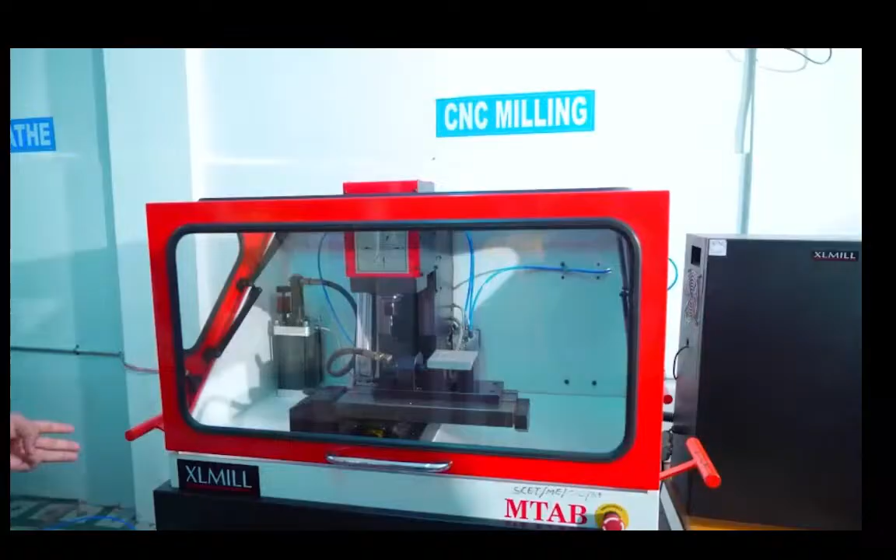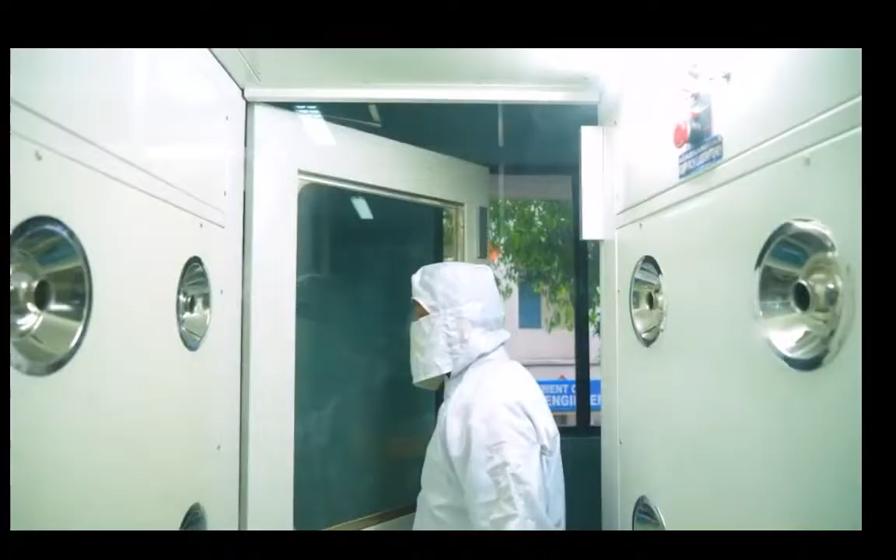Workshops of all branches, namely mechanical, electronics, computer science, robotics, artificial intelligence, nanotechnology, are equipped with latest machinery and tools that help the students to hone their practical skills.

Swarnandhra constantly motivates its students towards fulfilling learning experience. There are 5 separate hostels available in the campus of Swarnandhra College of Engineering and Technology. Hygienic mess and food courts. Round-the-clock security. CCTV surveillance in the campus. Departmental stores and ATM center serve the needs of students here.

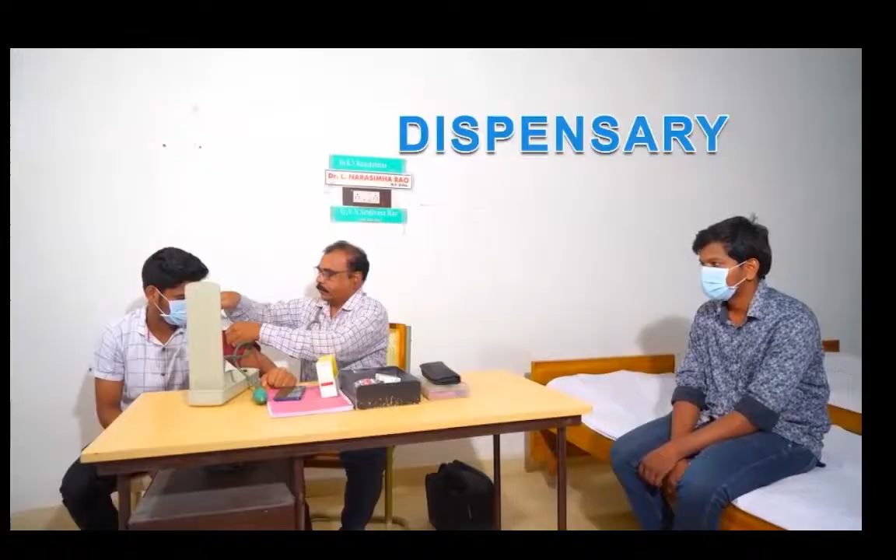Support of industry professionals. Your admission into Swarnandhra College of Engineering and Technology makes you transform your tomorrow with the skills you learn today. Because stepping into their engineering program molds your creative absorption into technological passion.

The UG courses in BTech ranging from civil, mechanical, electrical and electronics and communication, computer science, information technology, artificial intelligence and machine learning, CSE and data science.

CSE cybersecurity, CSE and business systems, artificial intelligence, data science, robotics. PG courses such as MBA, MCA, MTech, structural engineering, power electronics, CAD, VLSI systems design, computer science and engineering, thermal engineering, communication systems, diploma courses like electrical and electronics, electronics and communication, computer science and engineering, artificial intelligence are all dealt with efficient range of commitment and euphoria. Swarnandhra College of Engineering and Technology not only offers all these branches and courses, but also encourages its students to work on live projects and collaborate with their peers, giving them a taste of real-world scenarios. Outcome-based education, choice-based system, open institutes for academic enhancement. They are all well-qualified and experienced faculty involved in quality education and R&D activities.

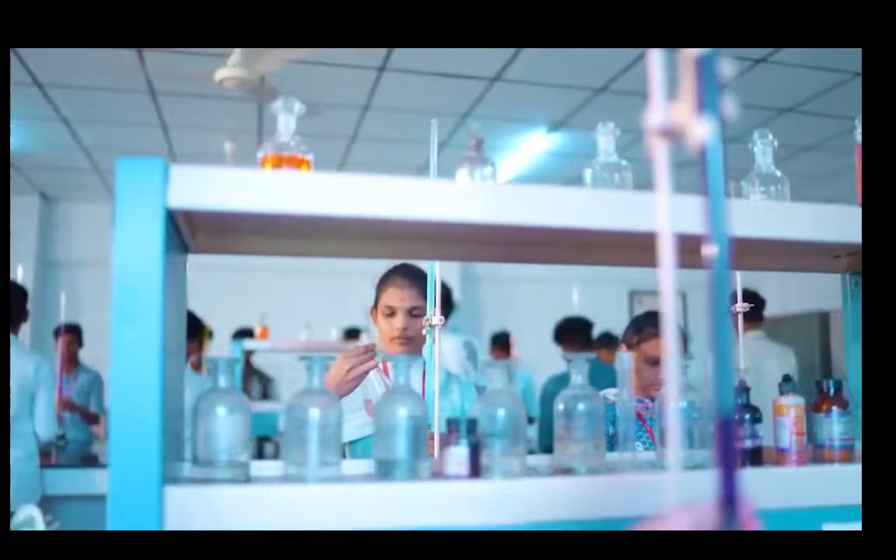Faculty members of Swarnandhra College of Engineering and Technology are not only knowledgeable but also passionate about teaching. They ensure that the students are equipped with the latest technical knowledge and are prepared to face the challenges of the industry.

Swarnandhra College of Engineering and Technology paves the path to discover the power to innovate with its centers of excellence: the CM's Skill Excellence Center, IBM Center of Excellence, Indo-German Collaboration ARC Laboratory, Intel Center of Excellence, VMware Center of Excellence Laboratory, Dassault Systems Lab, Cisco Networking AWS Lab, Nanotechnology Research Laboratory, and IoT Incubation Center.

Swarnandhra College of Engineering and Technology believes in the holistic development of its students, with a wide range of extracurricular activities that help students develop their leadership skills, communication skills, and teamwork abilities. A fabulous auditorium hosts various events and guest lectures throughout the year, and sports facilities such as cricket,

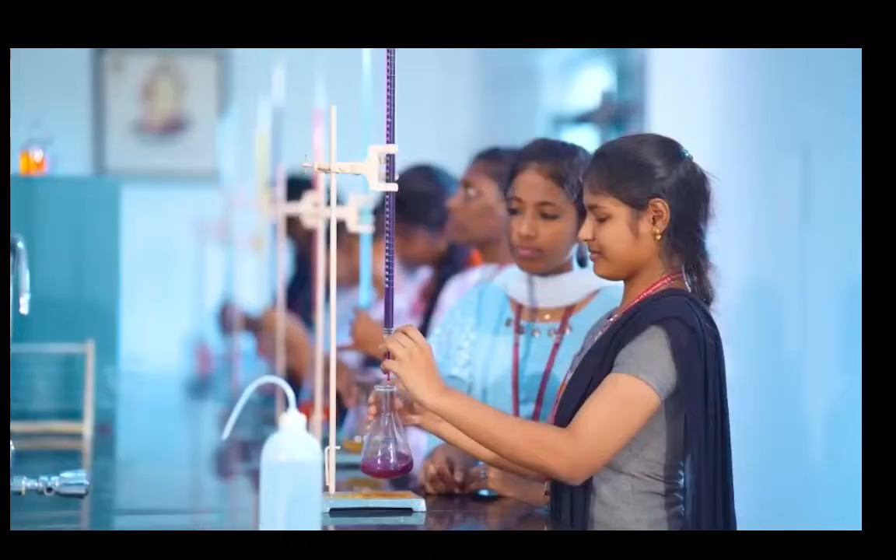With its more than 2 decades of untiring and uncompromising quest, empowering the next generation of engineers, Swarnandhra College of Engineering and Technology had unleashed the potential of thousands of enthusiastic students with its engineering program. Yes, Swarnandhra College of Engineering and Technology is pushing the boundaries of technology. Are you ready to join it? Do you want to forge your own path with its top-notch engineering curriculum? Don't you want to be part of a community of innovators, creators, and problem solvers?

Swarnandhra is a place where thinking out of the box is contagious, and it is also a place where ideas inspire change. Here you are welcome to the prestigious Swarnandhra College of Engineering and Technology, where excellence meets innovation. It is a well-maintained campus with green orchard in beautiful ambience, very conducive. 2,000 computers are available with LAN connection and an internet facility of 800 Mbps bandwidth, and Wi-Fi signals spread to all the nooks and corners of the campus. A separate computer center with digital library and a central library with 60,000 volumes and 9,500 titles are available for the students with hands-on experience in their respective fields.

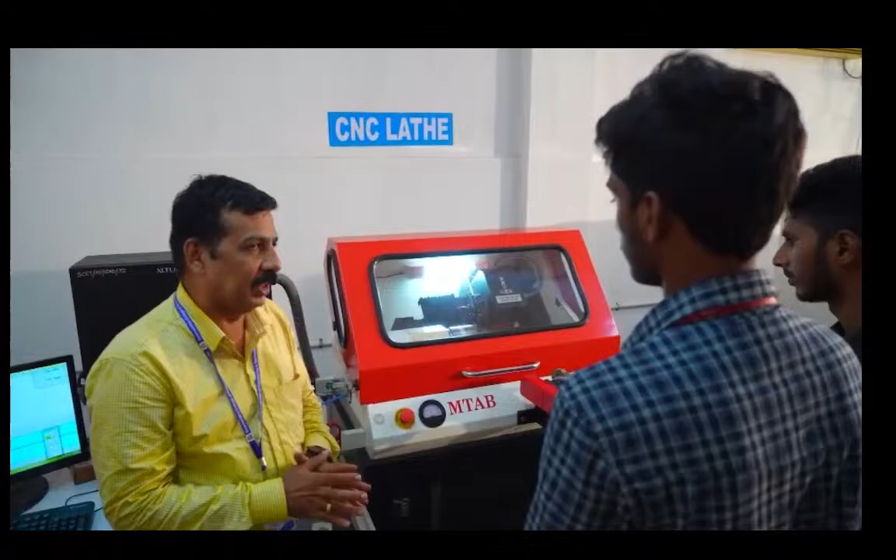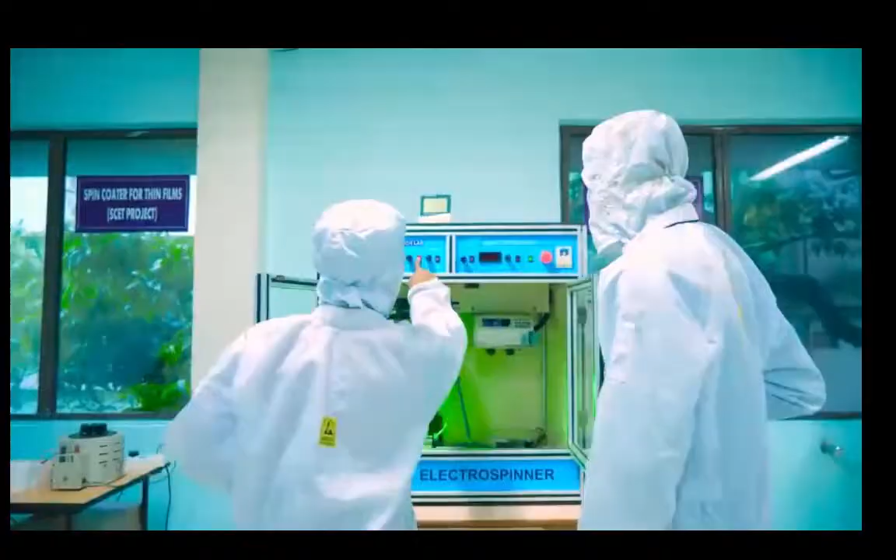Workshops of all branches, namely mechanical, electronics, computer science, robotics, artificial intelligence, nanotechnology, are equipped with latest machinery and tools that help the students to hone their practical skills.

Swarnandhra constantly motivates its students towards a fulfilling learning experience. There are 5 separate hostels available in the campus of Swarnandhra College of Engineering and Technology. Hygienic mess and food courts. Round-the-clock security. CCTV surveillance in the campus. Departmental stores and ATM center serve the needs of students here.

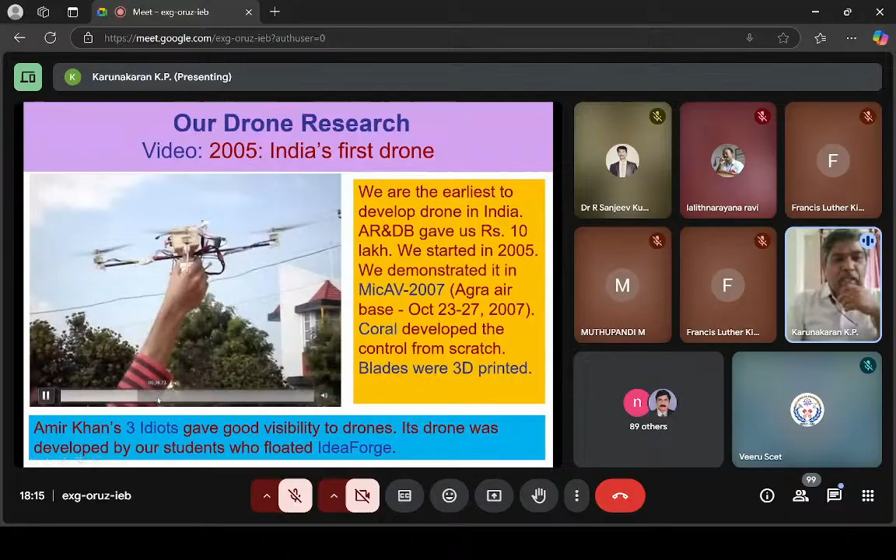That's a video of our first drone. At that time, even the controllers were not available. It was totally unstable. The sensors were not very amenable. So you see that it's flying somewhere. Somehow we managed to.

Sir, please unmute, sir. Okay. Oh, you didn't tell me at all. Should I repeat? No, sir. No, continue, sir. Okay. How did it happen?

Okay, I told here that we are the first in the country to develop a drone. This is our first drone, or probably country's first drone. Okay, so last year we introduced it as part of our curriculum. We call the courses MS101, Makerspace. MS stands for Makerspace. So in the second half of the semester, about 6 weeks, each week has 2 lab sessions, so totally about 36 lab hours.

762 students built 127 drones. So that is a very good achievement, and that is still continuing for the third semester, because drone is a product which involves all fields of engineering. So we thought it is important to introduce drone because electronics is involved, chemistry is involved, fluid flow is involved, carbon fiber is involved. So almost any technology you name, control, that means electrical department, then computer science department, all are involved. So it's a very good package to teach what is mechanical engineering.

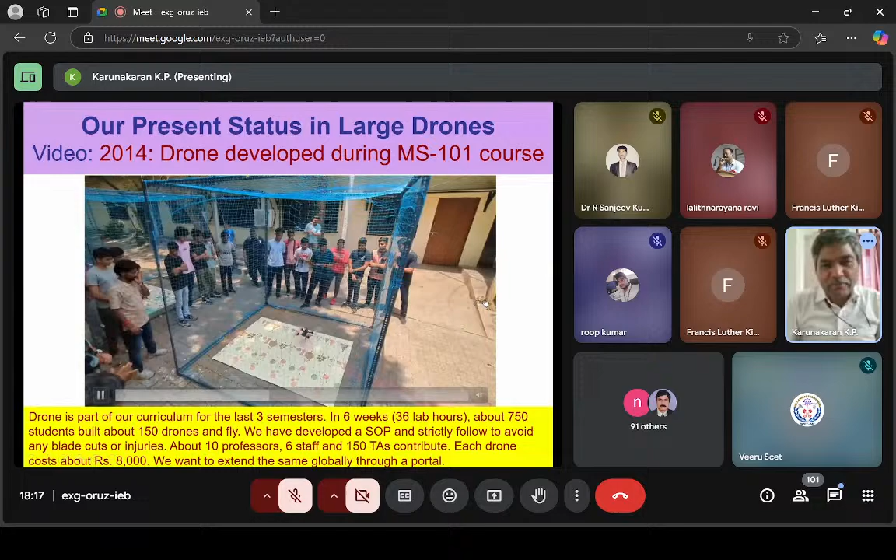Okay. Subsequently, I switched over to manned drone. In fact, initially I started with coaxial helicopter that I showed in the opening slide. Then we realized that larger propellers and powerful batteries are available. So we switched over to drone again way back in 2019. Okay, then we made a mock-up, demonstrated it in Delhi.

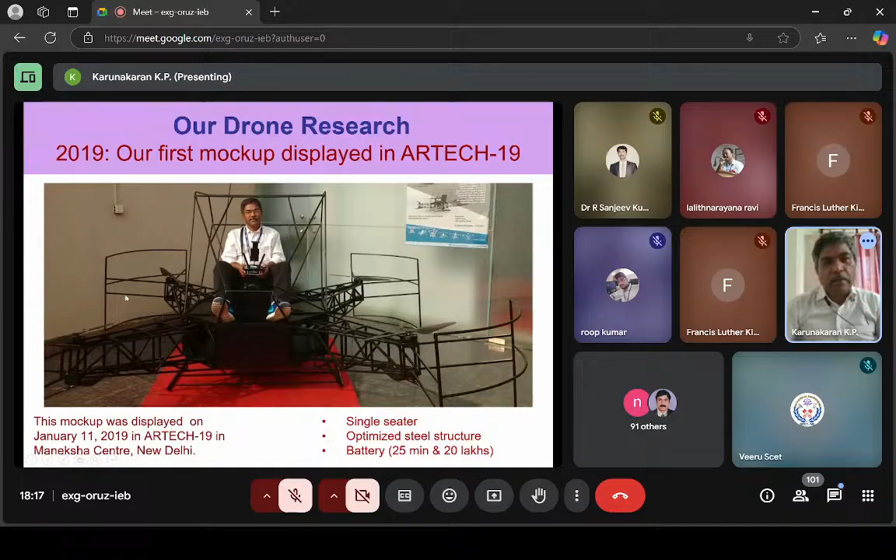It's a static mock-up. So we started the work in 2019, and by 2021 I was able to fly the first drone, and this is the flight test on April 10 last year. And I don't allow my students to fly, so I only sit and fly because it is still not a very reliable product. So I could reach a height of about 10 meters and very stable.

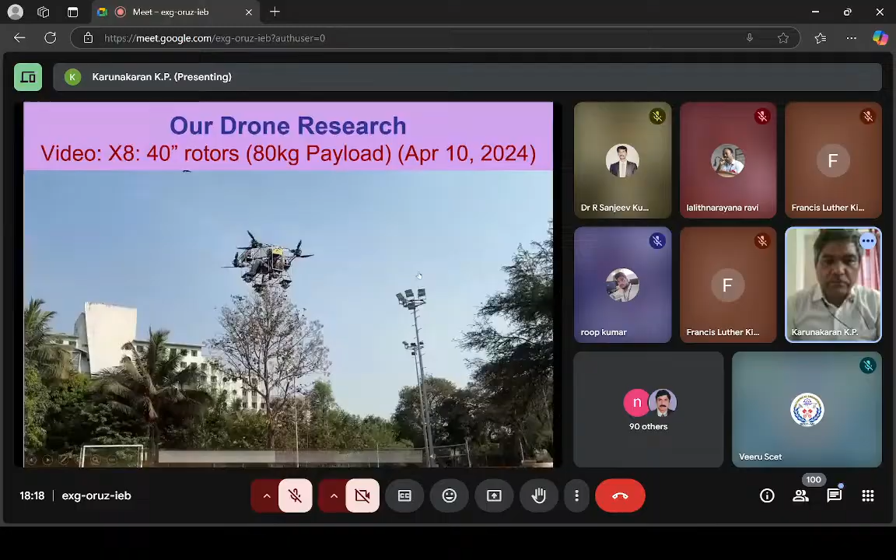So you see that this has 8 rotors. And we used football as the landing gear. You see the bouncing is very good. And what we used for the body is stainless steel. You know, normally people talk about aluminum or carbon fiber material. We decided to use stainless steel and fabrication through welding, because that becomes very affordable. Not only affordable, it is also good in fatigue life.

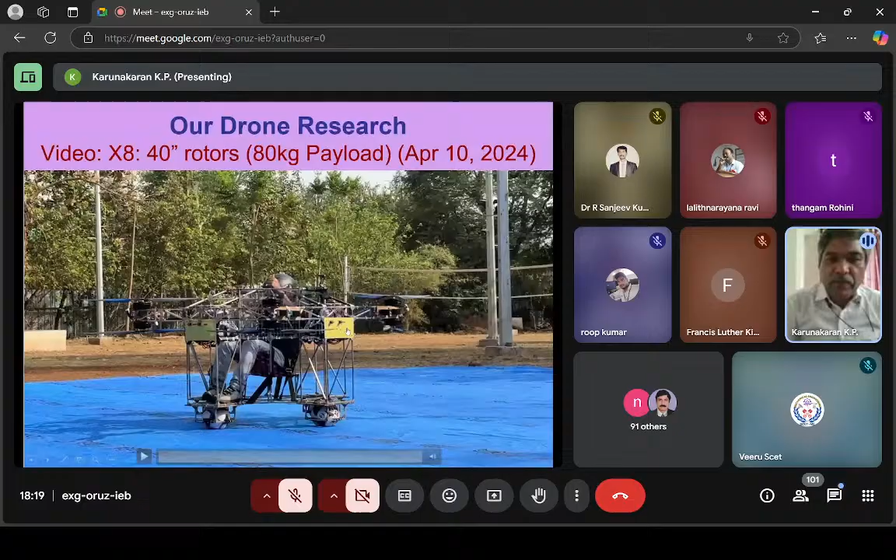So then the power of 8 rotors was not enough. So either I should have gone for larger rotors. These rotors are 1 meter or 40 inch in dia. So we didn't have money to go for larger diameter. So we bought 4 more motors and then built a 12 rotor system.

So you find that in order to save space, we keep rotors as pairs. Actually, they are known as coaxial contra rotors. So there are 6 pairs of coaxial contra rotors in this. Recently in Andhra Pradesh also someone has tested it. There were news about that.

This fluctuation is because of my lack of expertise in flying. You see a football fell down also. So one of the footballs became loose and fell down. But it doesn't matter. There are still 5 more footballs to land. So the boy is showing hand asking me to land because one football fell down.

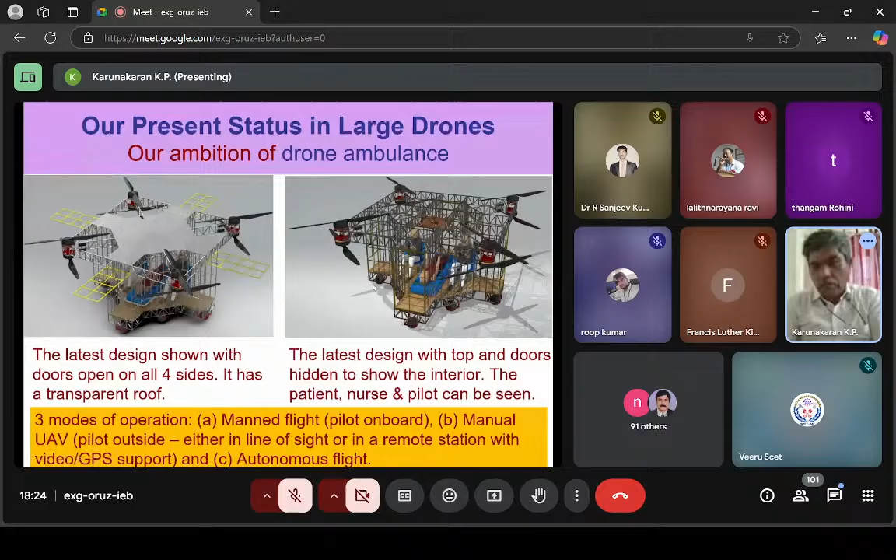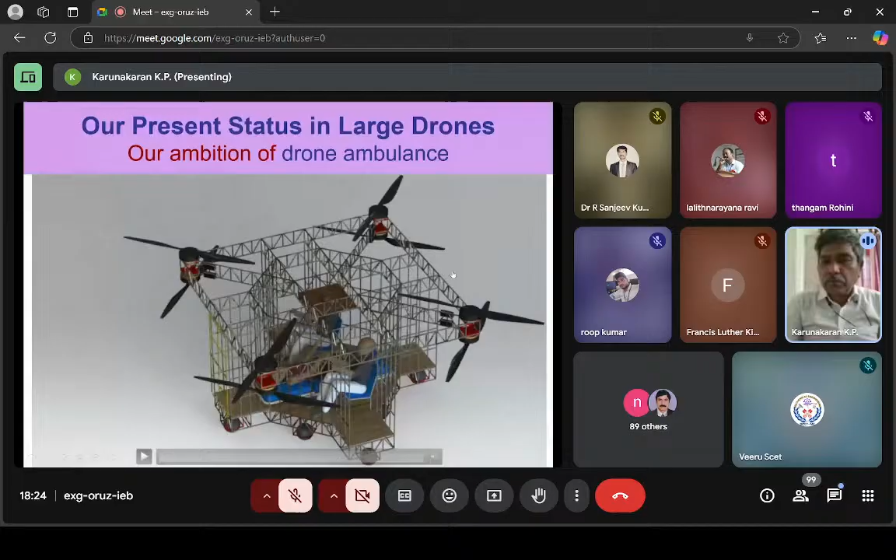So this is an animation of what we are proposing. This is how the patient will be loaded. Then the door will close, then it will take off. So this is something we want to develop. In fact, day after tomorrow, I'm making a presentation to DRDO for funding.

So if we carry a mat, as I said, then we can even land in unprepared areas like the Siachen or Leh area where you need to pick up some emergency patient. So it is meant for such applications. So drone ambulance is a very noble application we are looking at. Its takeoff weight will be around 650 kg and it can have a payload of 250 kg easily.

And if it is a battery version, you will get only about 20 minutes of time maximum. One may prove it for even 40 minutes, but when you actually plan a mission, you should not plan beyond 20 minutes using a battery-based system. Okay, now I'm going to focus a little bit on the fundamentals. Probably we'll spend substantial time on this.

Is the presentation going okay? If there is a problem, let me know. For example, I didn't notice that it was in mute.

Okay. So you're all familiar with degrees of freedom. Any object in space has 6 degrees of freedom. So we can look at each of these with the degree of freedom. If you look at a train, although it can go from one place to the other involving 3 degrees of freedom, movement in X, Y, and also a turn, it is actually a 1 degree of freedom for the driver because the other 2 degrees of freedom are from the rail laying itself. He never turns it.

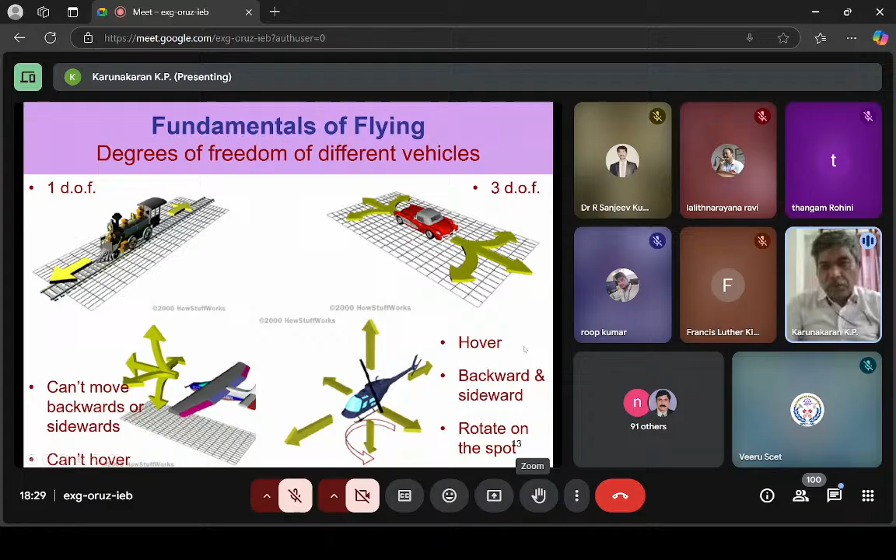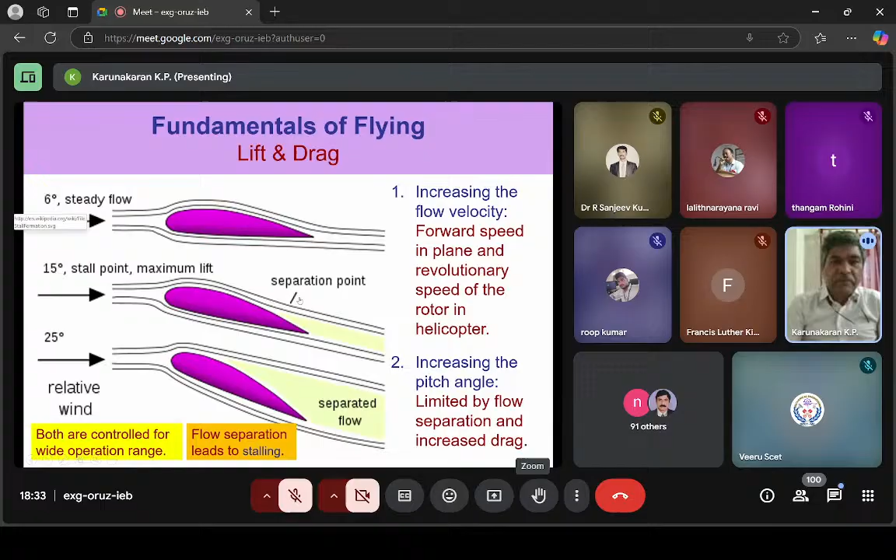So angle of attack, you cannot go far beyond. Maybe you can go up to 15 degrees, 0 to 15 degrees. Okay, the moment you go beyond that, flow separation starts, so it loses its effectiveness. Okay, so forward velocity is better instead of higher angle of attack. So these are the two parameters that control the lift, which is associated with some amount of drag also.

Okay, now we'll come to the control functions. If you take a plane, what are the controls you want to do? You want the plane to go up and down, okay? And you also want the plane to move forward, you want it to take turns and all that. So in terms of a Cartesian coordinate system, if we assume that along the length we have the x-axis, along the wing we have the y-axis, and the vertical is the z-axis,

then we can say that we want to move along the positive x direction, along the positive or negative y direction, along the positive or negative z direction. Okay, so three linear directions of x, y, and z. In addition, we also would like to rotate about the z-axis. That's all we want. Okay, but in reality, it is not going to be so straightforward.

In reality, there are only 4 controls. Okay, they will have different names. One control is power or throttle. Okay, you increase the power delivered by the engine. Maybe here there is a propeller, the propeller rotates fast. So what does it lead to? It leads to an increase in the forward velocity. So throttle is 1. Okay, then you have 3 things: pitch, roll, and yaw.

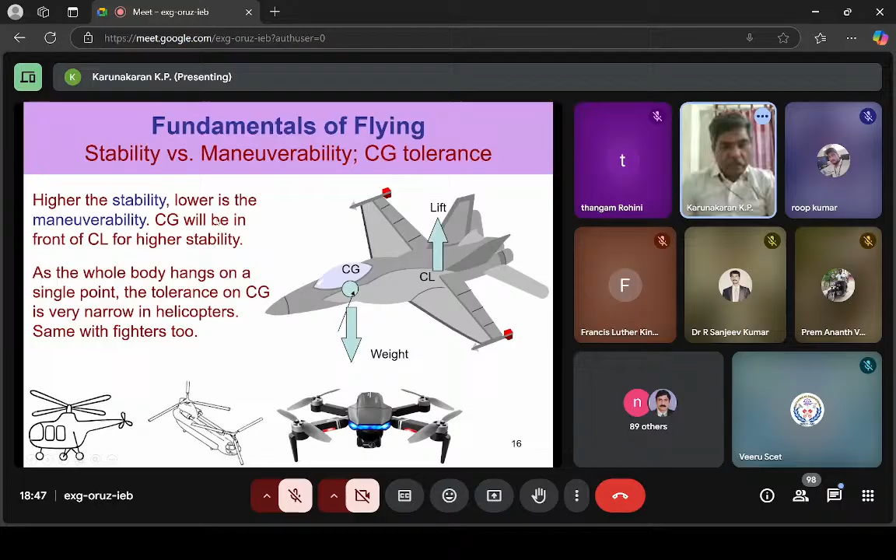So along the flying direction, you have the flexibility or center of gravity tolerance, because CG can be anywhere in this line. But when you look at a drone, you have huge tolerance on center of gravity because you have 4 points lifting. Okay, so if you connect all the points by either a square or hexagon, within that square or hexagon it can have the center of gravity lying. Then it is stable. So that explains why a multi-rotor is far more stable than the other helicopters.

Okay, now we'll see a little more about helicopters. This is how a typical helicopter we all see looks like. You have a main rotor and the body is known as fuselage, and this is the cockpit, and this is a skid type of landing gear. You have a tail boom, and the tail boom has a rotor, which is the tail rotor.

Okay, now you will find that in all devices, whether it is electric motor or, I'll show the picture. I'll come back to that later. Where is it? That is important to show, so I'll show that.

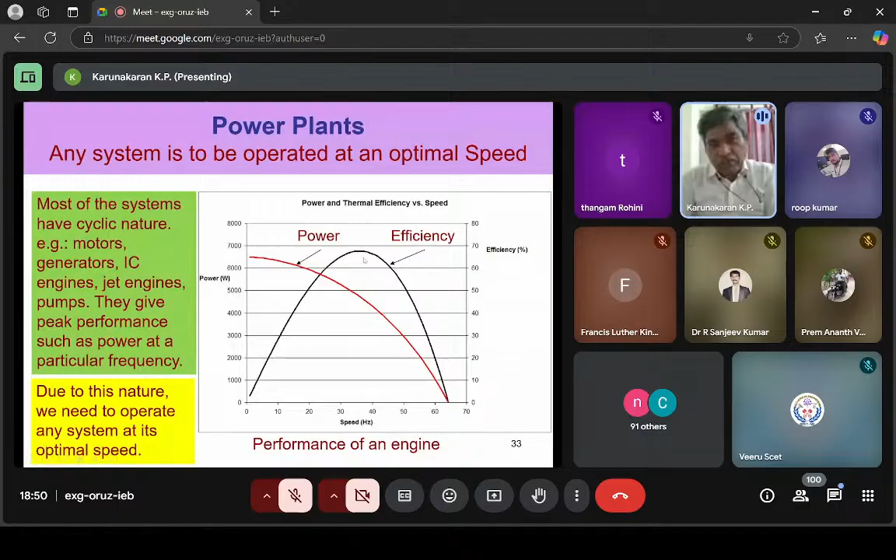Let's take a regular IC engine where around 6,000 RPM your efficiency is high. Then you should remain within plus minus 500 of that 6,000 RPM. So you should operate within this range in order to be efficient. This is true with all power systems.

Now I am coming back to this. So here, typically for a helicopter, let me assume a value of 1000 RPM. So I would like to operate it between 900 to maybe 1100, not beyond, in order to have good fuel efficiency.

But then that means my πDN/60 gets fixed almost. The forward velocity with respect to the blade gets almost fixed. So what is the other alternative you have? You have the angle of attack. Okay, so you can control the angle of attack. So in helicopters, both the tail rotor and the main rotor rotate almost at the same RPM with maybe 10% plus minus variation. Okay, so by adjusting the angle of attack only, they make it go up or down.

Okay, so that is mainly for getting higher efficiency. This is a very important point you have to appreciate. Okay, so they are doing pitch control. That means it's not like our regular fan where the blades are at fixed position and keeps rotating. Here, this fan is rotating. At the same time, the angle of the fan keeps changing around each rotation. That is one thing you have to remember.

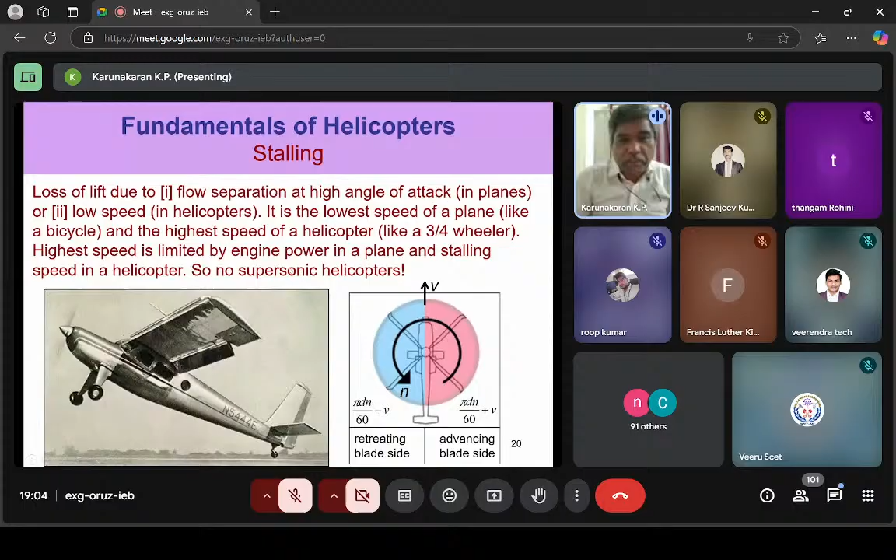So we were talking about a lot of things. Have control on yourself. Note down some words which you can read about later, because in one lecture you cannot completely understand everything. So we talked about two types of pitches: collective pitch and cyclic pitch. Now this is the traditional helicopter where we do collective pitch and cyclic pitch, and it's very efficient.

But if you are a hobbyist and you want to build a single seater, then people normally use a fixed pitch, and then they completely tilt the body of the engine, and by body tilting they achieve that. We'll not go into the depth of it. We'll move forward because I have not yet come to the drone except mentioning it in the beginning.

Now let's have a quick comparison of flapping, fixed and rotary wing systems. By rotary wing we are referring to helicopters and drones. By fixed wing we refer to planes. By flapping wing we refer to ornithopters. Ornithopters, as I said, are not yet in an evolved condition because of material and other limitations. Flow analysis is again a very complex thing to be done in ornithopters. So this table only compares fixed wing and rotary wing, or planes and helicopters and drones.

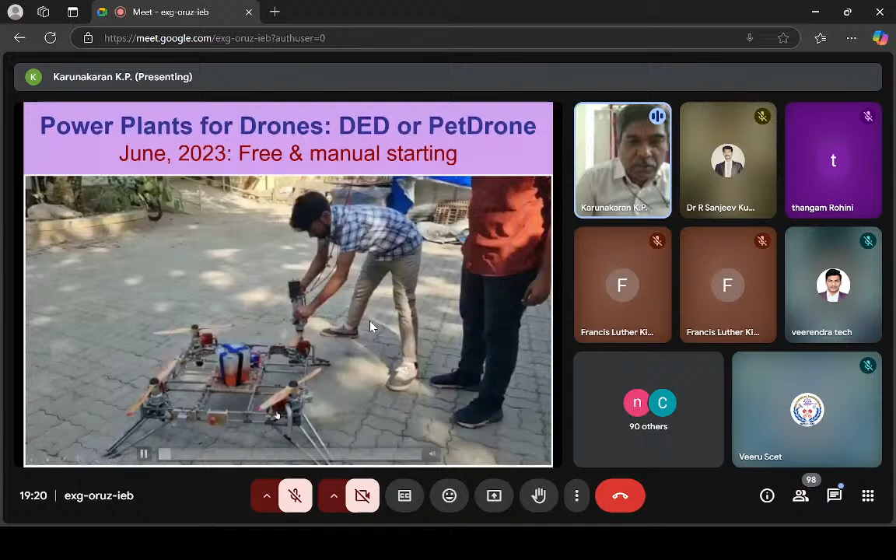Interestingly, you will find that IC engines cost 1/3 in price, and they can fly for easily 90 minutes. So the net benefit in terms of endurance and cost is about 10. So taking the idea from that, we also built our thing. We bought 4 engines from Germany, very light engines, and then we cranked by hand. So by hand we had to crank it.

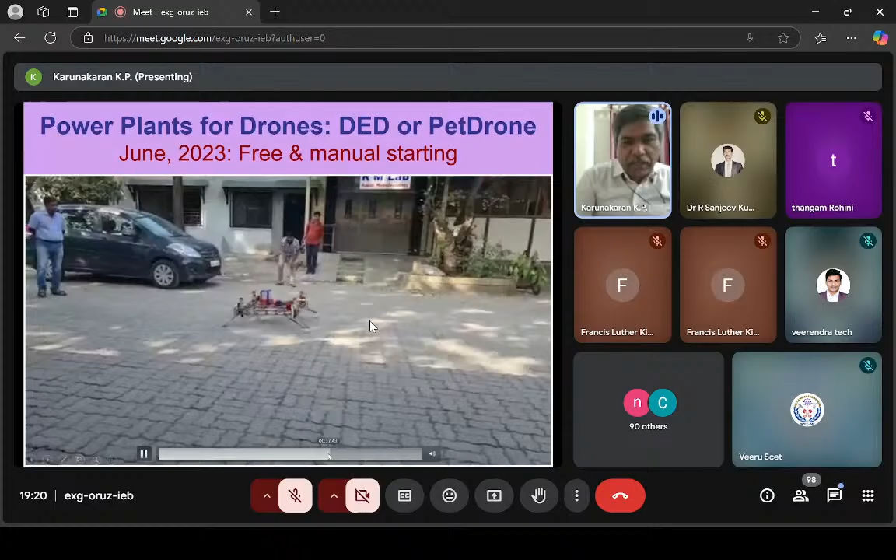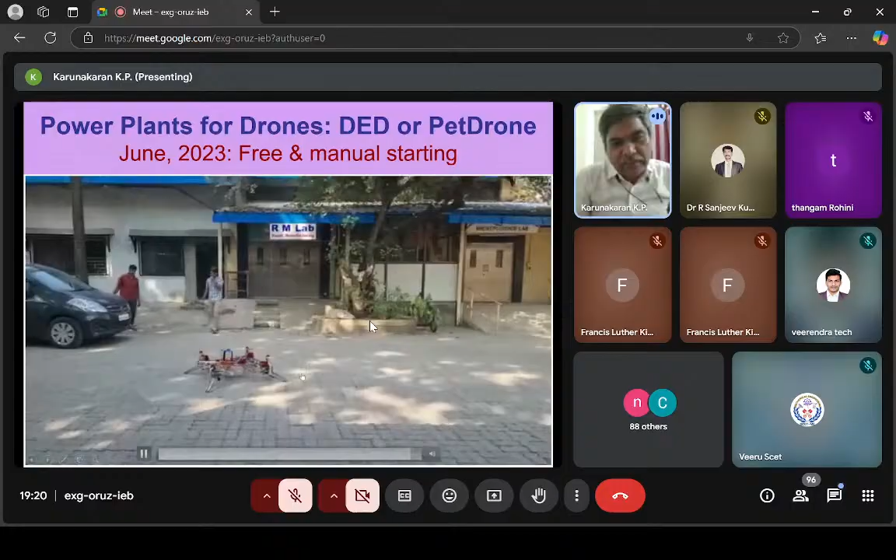This is a petrol tank. We are still working on it. There are a lot of vibrational issues. We are trying to overcome that. So it can easily give 90 minutes. Right now the vibration is disturbing the sensors. We have put some mufflers. Let us see how it goes.

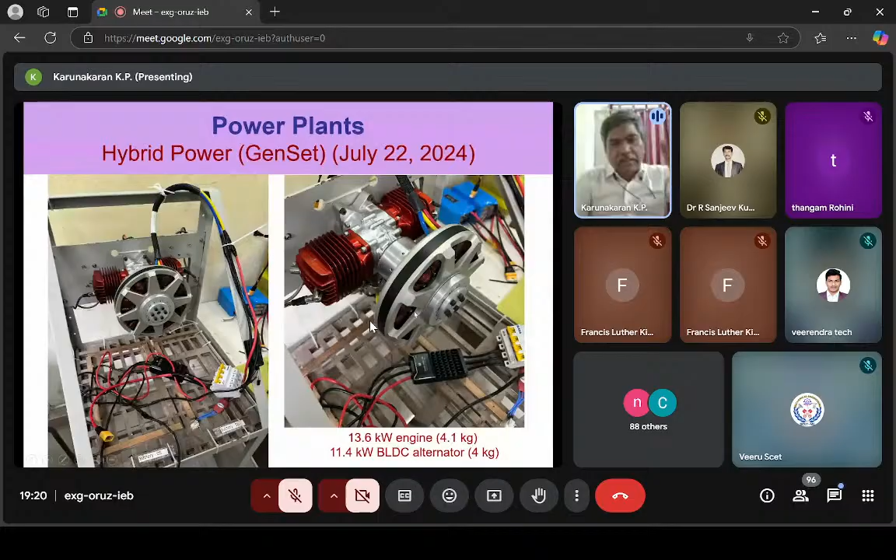And this is our generator set. I told you, an IC engine can drive an alternator. So this is also something we are working on. Together it will weigh: this is 4 kg, this is 4 kg, then the DC-DC converter and rectifiers, power electronics will be 2 kg, about 10 kg. Together we'll be able to make it.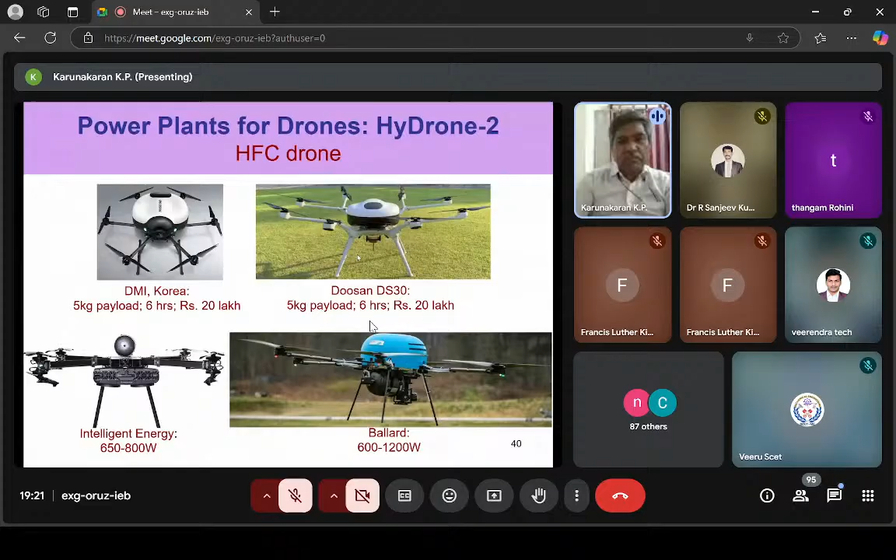And this is something known as a hydrogen fuel cell. It runs on hydrogen. What you see here is a hydrogen tank. This can fly easily for 5 hours or 6 hours non-stop. It's very, very expensive, but this is the emerging technology. One important benefit is long distance coverage. The second important benefit is it is green because the exhaust is H2O, steam.

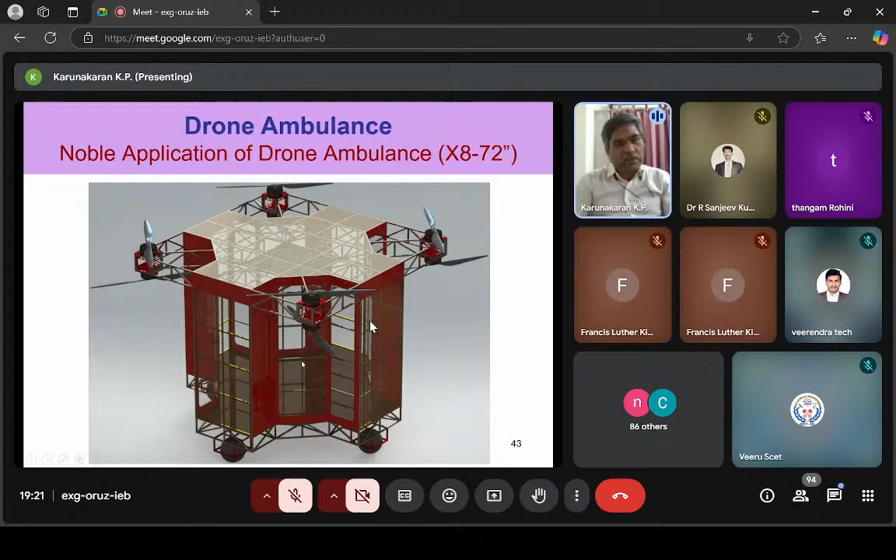So I'll come to the conclusion slide. Our ambition is to develop a very safe, rapid and affordable drone ambulance. We need at least 2 crore money. We are running around for that. Now, it is nothing but a platform of 250 kg payload, and depending on the power source used, the endurance can be from 20 to 30 minutes up to even 6 hours. And we are using a stainless steel structure which has good fatigue life. It is strong, it is very, very cheap.

So we have several options possible in drones. Depending on the application, you can decide what payload you need, what endurance you need. Depending on that, you can select what type of power plant, whether it should be a quadcopter or a hexcopter, whether it should be coaxial type or in-plane type. So it's like cooking, you have recipes available to suit different applications today. So we are running around for money in order to build this drone ambulance. Let's see how much I succeed.